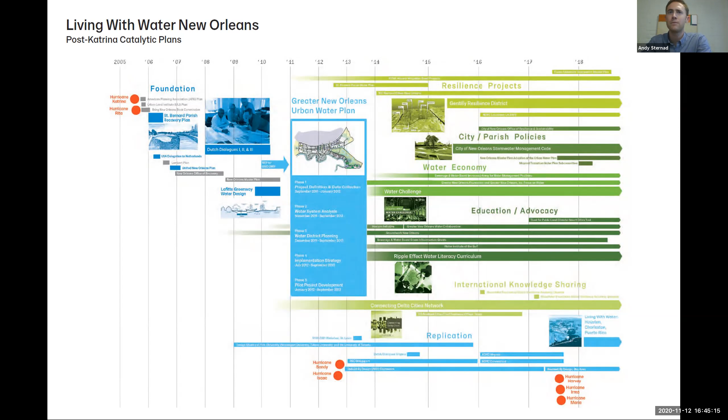So this is a project that we worked on with the city and with DDD. Just for context, I'm thinking about water opportunities, ways to mitigate flooding downtown, at the same time to add streetscape benefits, maybe refresh some of the park and public spaces.

So these are just kind of major stakeholders in the area. I think most people on the call are probably familiar. But the two key things to keep in mind, the two key locations, are Duncan Plaza and the Armstrong Lafitte area. These are the two main public spaces downtown, the two biggest. And they also remarkably are well positioned within the drainage system to make a huge impact in terms of water storage if they can be treated as such. They also tie in to the Lafitte Greenway, Lafitte Blueway proposal that maybe still can be realized in a visionary way in the future.

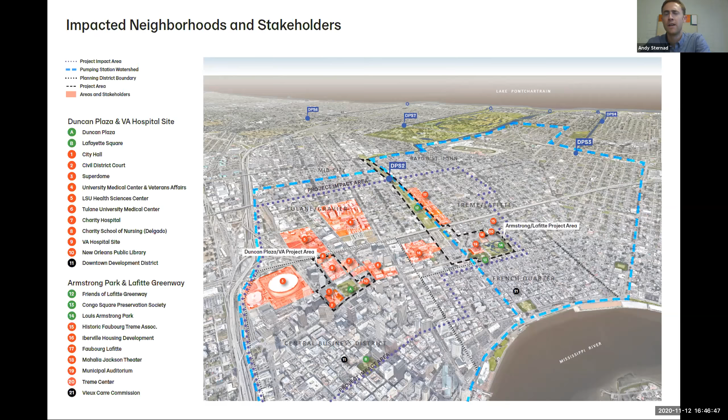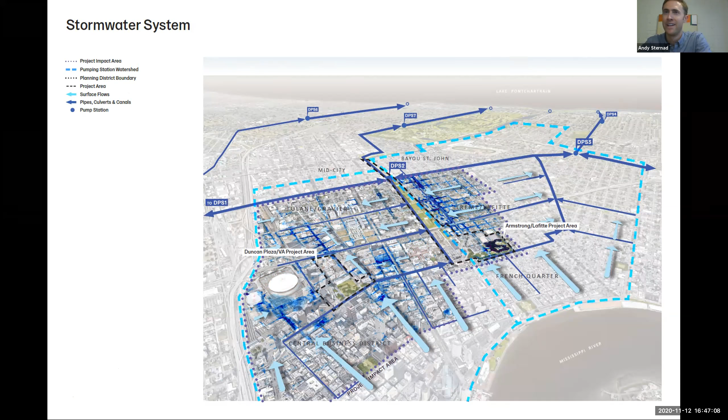So here you see the subsurface and kind of the overland flow system aligned. Basically, water that falls, rainwater that falls by the river is ultimately moving towards the lake. It finds the first drain that it can and goes into those darker blue lines, the subsurface canals, some of them big enough to drive a bus through. This is all things we're familiar with here, and it moves out towards the lake, towards the outfall canals.

But the one to notice here is along Loyola Avenue. That's that orange line. That is a collector culvert for essentially all the water that falls downtown. And it flows underground, kind of along the streetcar tracks, right by Duncan Plaza. It flows to Armstrong Park and then makes a left-hand turn and goes out to pump station number 2, following along the Lafitte Greenway. So that culvert and that pathway is both a source of flooding when it backs up all the way downtown, up the slope towards the river.

But it's also an opportunity because it parallels and touches these public assets, publicly owned spaces that might be retrofitted while maintaining their recreation use, to alleviate the overburdened system. So that's where we focus.

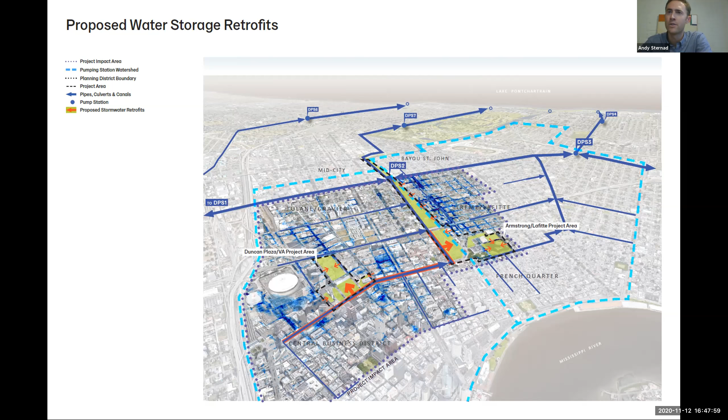And here you see in section, there's a little map key in the bottom left, but these are basically working from the river on the right down towards past the highway. You see how the vertical scale is exaggerated to be able to see the change in topography. But you get these pockets of space, of buildings and streets, behind small ridges and changes in the landscape that end up causing flooding downtown. And then a lot bigger pockets and pooling the lower down the slope you get.

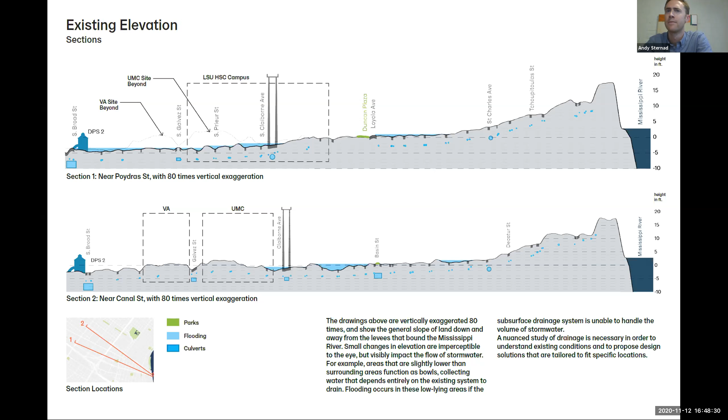But you'll notice that the two areas highlighted, that Duncan Plaza area, where you see those kind of arcing shapes, those are the berms in Duncan Plaza. And then Armstrong Park and Lafitte Greenway itself are higher in elevation than their surroundings. They're kind of that brown color, whereas surrounding them tend to be a little more blue. So it's kind of an inverted relationship right now. Those properties are actually shedding water into the drainage system when they could be collecting. And that's the basis of the proposal.

Just you see a comparison with the historical map. What once was wet will become again.

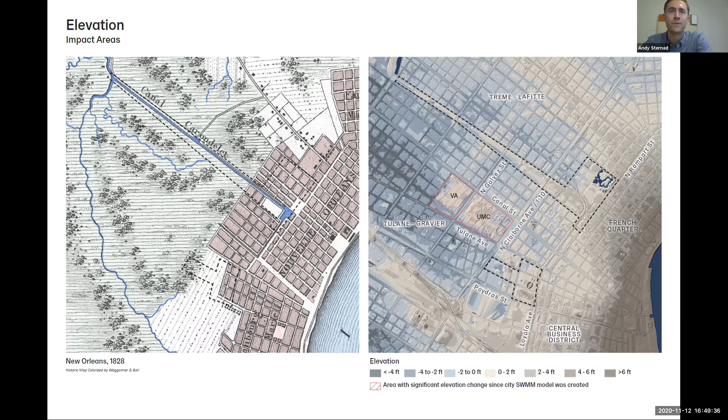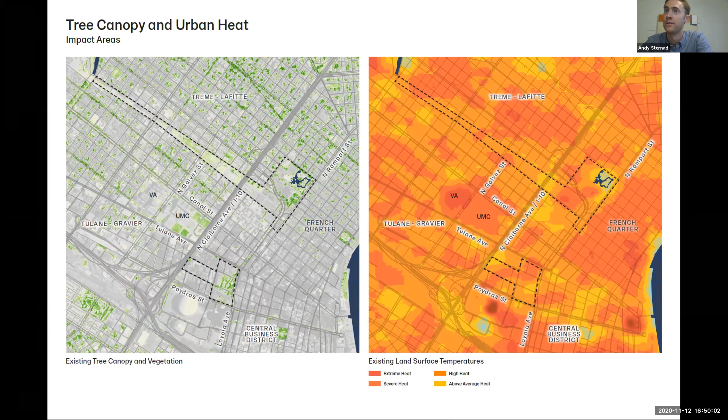And some of the other analysis underlying this project surrounding urban heat. So not only does tree canopy reduce urban heat measurably, but the presence of open water as well. You see that very clearly in Armstrong Park. And there's some historical data going back 100 years documenting the cooling effect of open water in canals, old canals across the city.

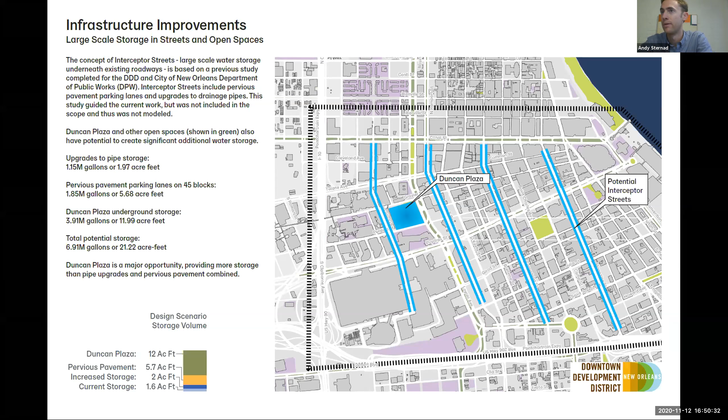So I'll get back to those two main areas, Duncan Plaza and Lafitte Armstrong, in a minute, but part of the proposal was for interceptor streets, working against that section that I showed you, that high ground to low ground topography. So trying to capture and store water where it falls before it can back up those main culverts. We identified through a whole series of criteria these potential interceptor streets higher up in the landscape, closer to the river.

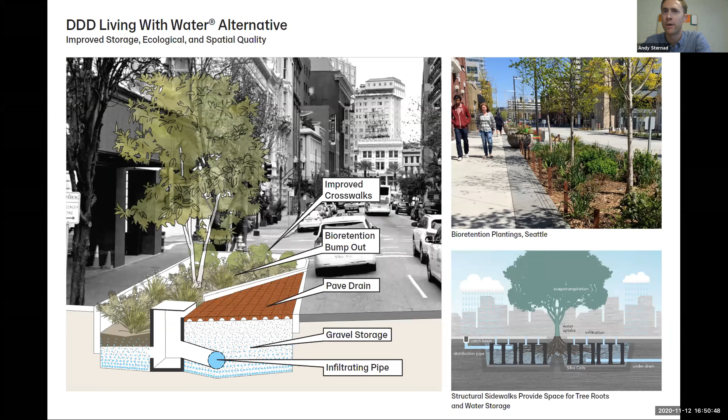It could be retrofitted with really simple things we've all seen before, these rain gardens, but strategically placed on certain streets and in certain rights of way to capture that upslope water. So that's part of it at every scale, starting from rain garden. But the big opportunities we see are these public spaces for their ability to leverage investment around them.

For the quality of life benefits they bring, not to mention the water system improvements, the bigger vision is for a series of scenarios. It's not just one idea or one vision, but a series of development, park design, and water system scenarios on these two locations: Duncan Plaza treated as a whole with its larger context of City Hall, the VA property, and the library. And then Armstrong and the Lafitte Greenway treated as a whole, also considering some of the housing developments alongside and the impounded neighborhoods along the Lafitte Greenway that currently flood. We'll show some potential benefit there.

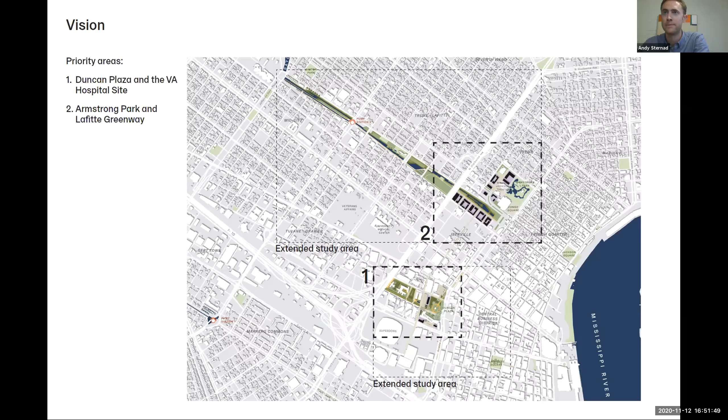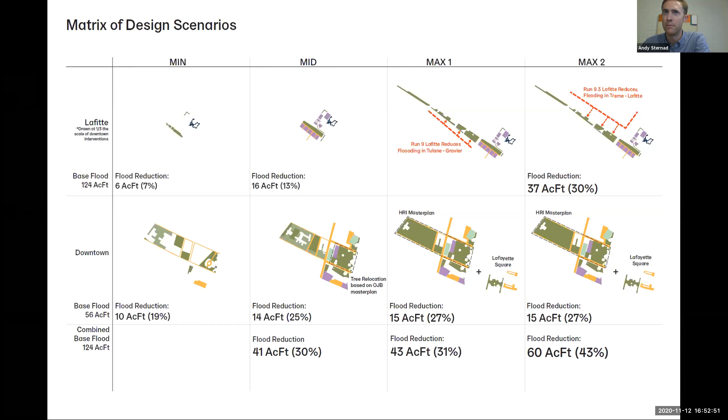The green doesn't represent just open space, the green and yellow together. The point is that this approach, these scenarios, can be tweaked and tailored depending on stakeholders, available budgets, land, and still add up to more than the sum of their parts. So, let me go back one. The proposed scenario was somewhere around between the mid and max. We didn't go minimal and we didn't go max, but tried to show what we could accomplish.

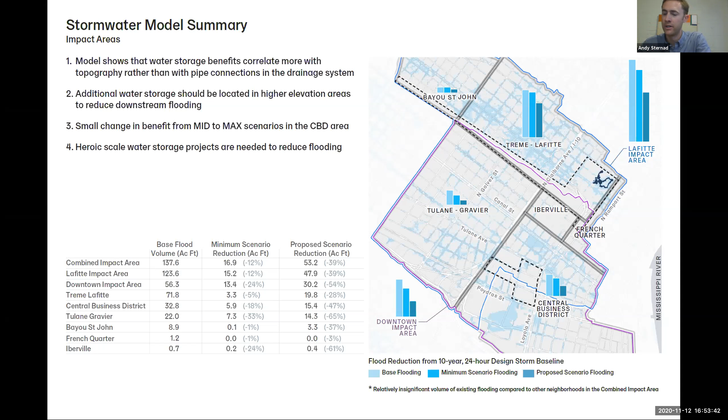For the impact of these particular properties, Duncan and Lafitte, it's huge. We're seeing in some cases 8 inches, 9 inches. In this case, somewhere around 6 to 8 inches of flood reduction. Over the scale of the CBD, that's a huge amount of water and a huge potential system benefit.

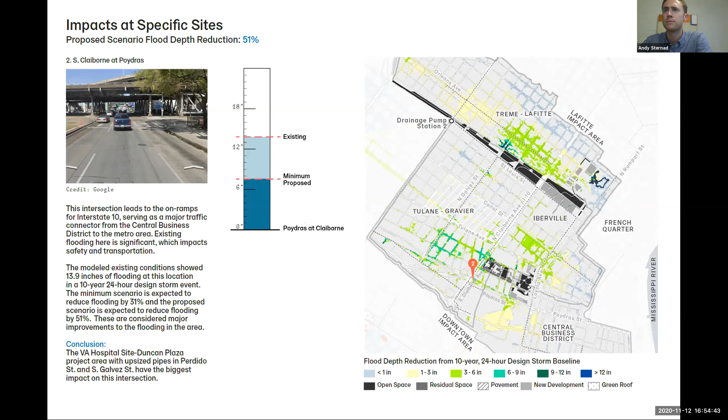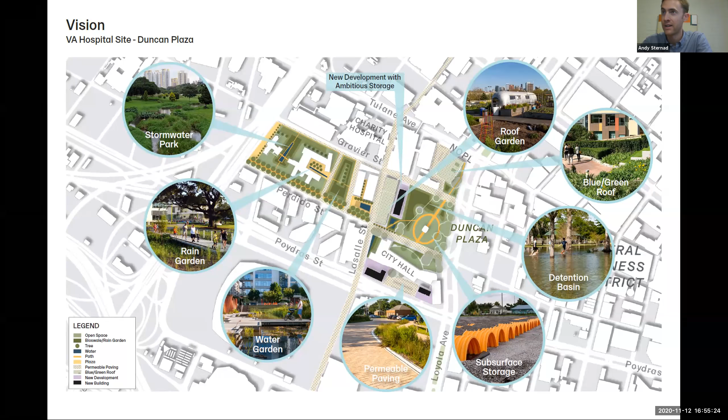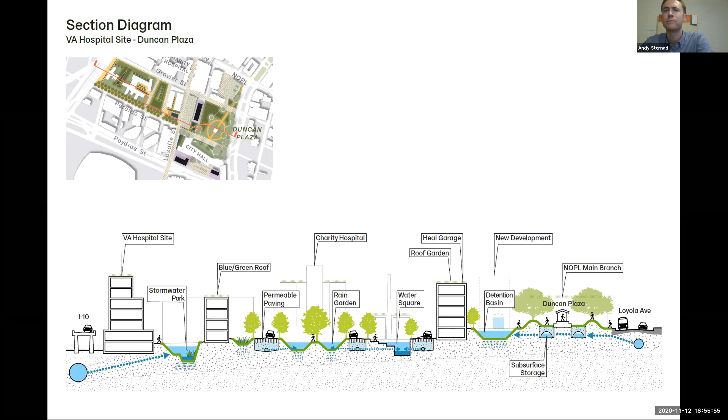Happy to talk more. So the vision for Lafitte is something like the Lafitte Blueway that was proposed in the water plan. Before that, even the Lafitte master plan, there's been a whole lot of proposals.

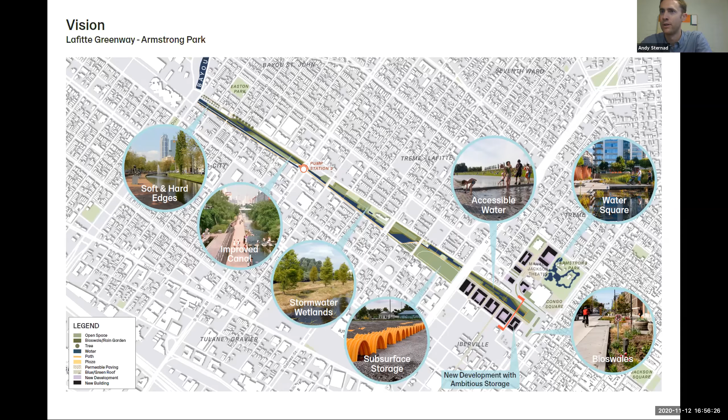The first key here for us is the old location of the turning basin, down on Basin Street, next to the municipal auditorium. That's where that culvert under Loyola turns and heads out to the pump station. It's a critical point in the system to provide a relief valve, what they call inline storage—taking water out of the pipe and storing it within the system, then it drops back down after rain passes.

But this is a key opportunity to tie into one of the oldest, most historic places in the city that was built around water historically. That turning basin that came down the canal from the bayou is the reason why the French Quarter is there. It's right next to Congo Square, aligned with Jackson Square, the key axis in the city. It could be one of the key moments for the identity of the city, tying to our deepest roots, if we can get some water back in there and serve the dual function of alleviating flooding up and downstream. I could evangelize about this thing forever—it's an amazing opportunity.

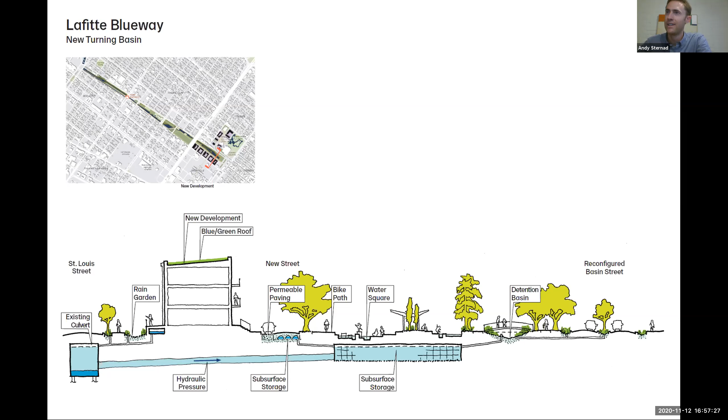Not to mention the conversations about relocating portions of City Hall, eventually a new civic center in New Orleans at the auditorium, and changes to Armstrong Park.

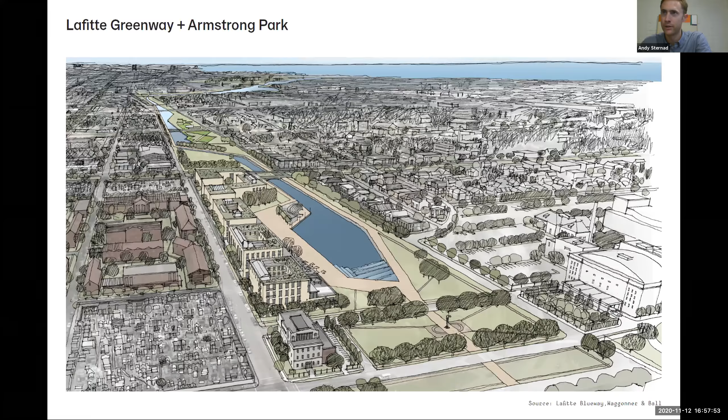Could keep going, but this is just one sketch, revised a little from way back in the water plan—not necessarily a current proposal, just a snapshot of what a coverage condition might look like at this side of the turning basin.

And another farther up. Wouldn't it be great if you could kayak or canoe from the bayou all the way down to the French Quarter like you could have done 150 years ago? It'd be pretty cool, and that feature could fill up when it rains.

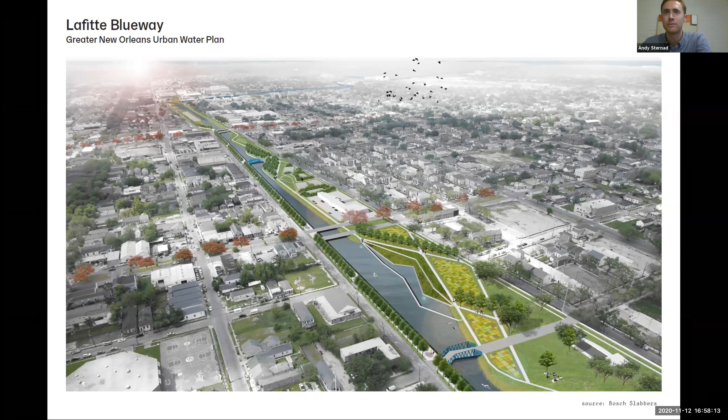Okay, that's the downtown piece. That's work that's happened over the last 6, 8, 9 months maybe, and hopefully can coalesce an energy around those projects with some other redevelopment ideas downtown and move forward.

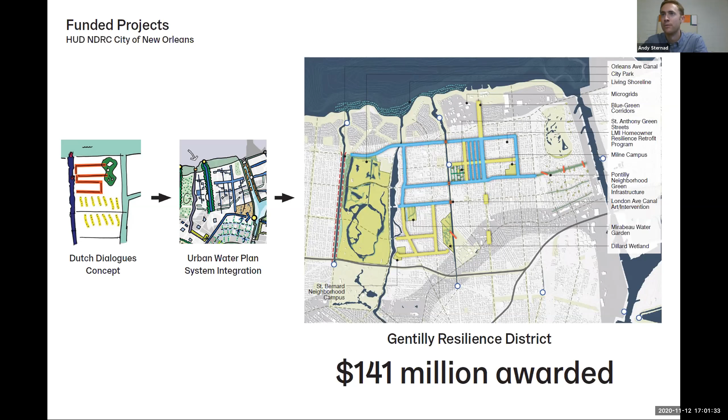A lot of firms in town, different firms are working on these projects. I think it's a great example of collaboration with the city and the kind of ecosystem and community of expertise that we can build up here, to David's point about what we learn here and what we take elsewhere, treating this work as a real living laboratory.

So part of the district, of course, is about mitigating flooding, and there's some measurable reductions and some modeling behind these projects.

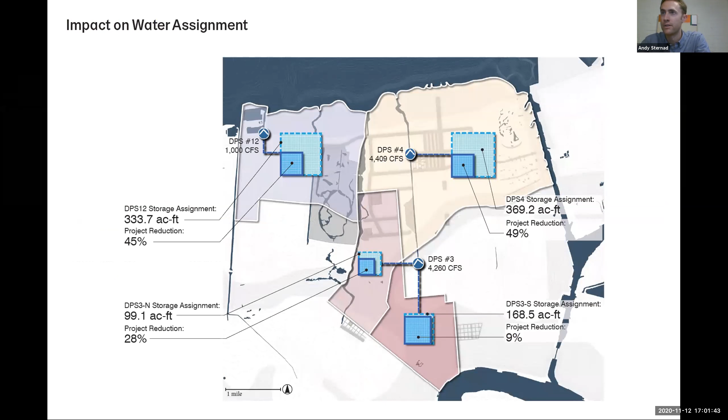City Park is a key part of this project. Also an ongoing project that we're working on with Batcher Engineering to find a way to add a little more stormwater storage, especially into the northern parts of City Park.

But it's a real comprehensive look at the lagoon system, which currently drains out of the park. There's inlets from the bayou, fill up the lagoons and keep the water levels stable, and any additional water is moving out into the drainage system.

It's another opportunity to reverse and let water back in when it's raining. Similar condition to opening up those buried culverts around Duncan Plaza. There's another one under Robert E. Lee along the north side, which could feed stormwater storage in the park while alleviating flooding in the surrounding neighborhood. So another one that's still underway.

But one of the keystone projects in the district is the Mirabeau Water Garden, and this is one that we've been working on for a long time, and hopefully will be breaking ground soon, any day now, hopefully in the next couple of months, maybe 6 months. But it's been ready to go for a while.

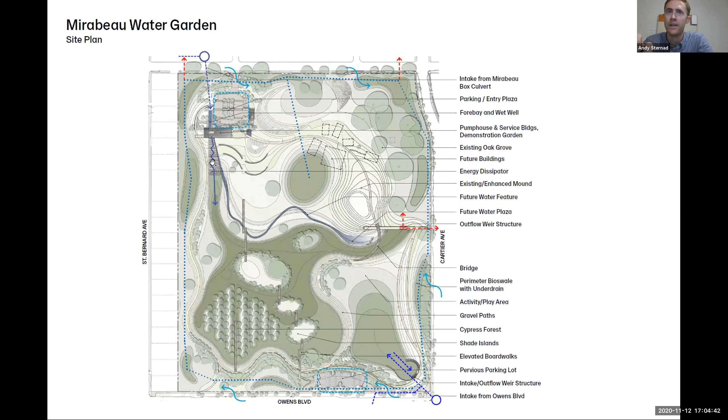So what we've proposed is another way to take water out of the overburdened system, in addition to taking water overland from the neighborhood and providing space in the park to store it. So there's a pump station in this upper left corner that's drawing water from underground when that pipe is full, and then allowing it to cascade across the landscape.

If you squint at it, it looks like some of the patterns you might see in a marsh restoration. I hope there are some familiar patterns to our local eyes. This landscape can fill up and then ultimately slowly drain after the storm passes.

So earlier kind of concept rendering, it's a little wet when it rains a little bit, and it gets a lot wet when it rains a lot. And it's an active and passive system combined.

The importance of this site in the larger water system is twofold. It's a really particular site that just coincidentally almost is available and happens to be really well located at the top of the watershed. So sort of the way downtown, where the projects you do in Duncan Plaza and Armstrong benefit everybody else downstream in remarkable ways.

But the second aspect is what's below ground. You may be familiar from Richard Campanella or others about the Pine Island sand trend that runs underneath Gentilly, all the way out to Mississippi Pass Christian. It's a remnant dune structure from when the coast of Louisiana ran through Gentilly, before the Delta was here, before the river created the rest of the Delta.

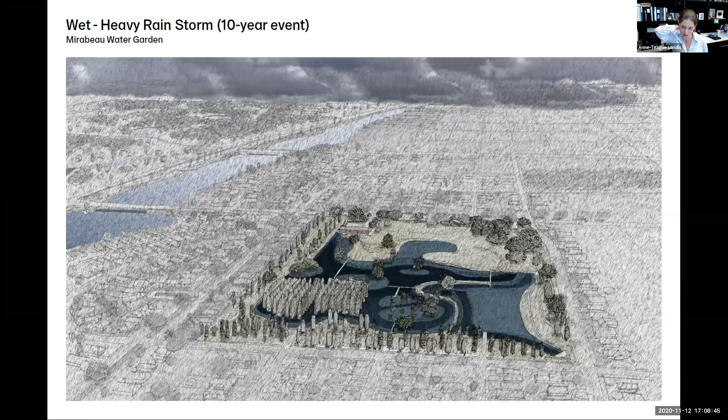I am. So there are a couple questions—I seem to be full of questions myself. From what you just covered, for City Park, I think you were focusing—you said there's a large park that's like on the north end, which happens to be where a rather expensive golf course is. Is there any push, does it create any kind of threat to that, that's creating pushback, or does it contemplate protecting that revenue generator for the park?

Yeah, so if it did flood, Anne-Teague, there would be water that would then back up through the enhanced lagoon system and flood some of the golf course. But that would be in a catastrophe, and it would keep the neighborhoods from flooding. Basically, on the west side is where the water would enter—it might enter as far over as the USDA site. We're still negotiating that passage across Robert E. Lee.

A project like this, interestingly, I think has great benefit to Lakeview, because if you're taking the water out here, the drainage system is moving onto Lakeview, so your water levels in Lakeview drop by virtue of this. So it's an interesting juxtaposition of where water falls and where it runs and where it floods. But this has been worked through with the park, and you can bet that Bob's probably not going to let us flood that golf course.

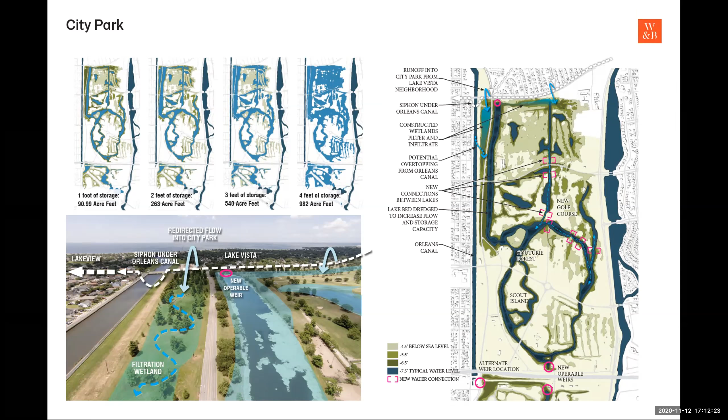David? I was going to say the Genesis program was Ripple Effect, set up to educate kindergarten through elementary school kids, but that program has expanded through middle and high school now. Ronell, I'd think Ripple Effect would be a good place to start, because there's several years of research there. There are programs like Dillard's workforce training, a component of that in the Gentilly Resilience District funding, and Tulane has some further programs. It really depends on the student and their ambition. There's also Groundworks, a great success story training people to build and maintain this. So there's a wide array of jobs, and someone who's 34 versus someone who's 13 would be looking at different aspects of that. But I think Ripple Effect is a good place to start.

Okay, so is it possible to get your contact or someone else's so I can continue that conversation after this presentation? Absolutely, I'll flash my email up at the end. Great, appreciate it. Andy@WBAE.com.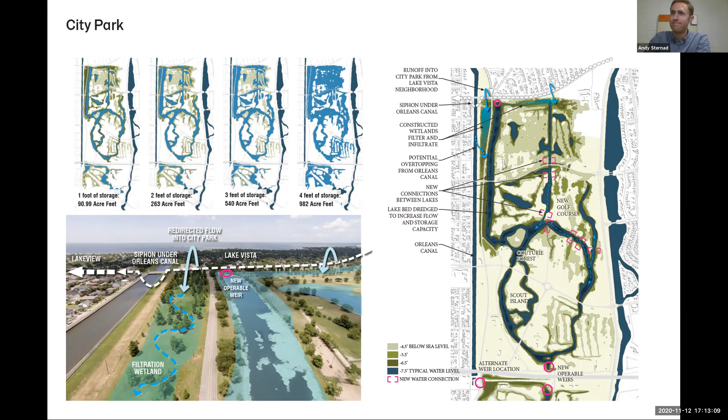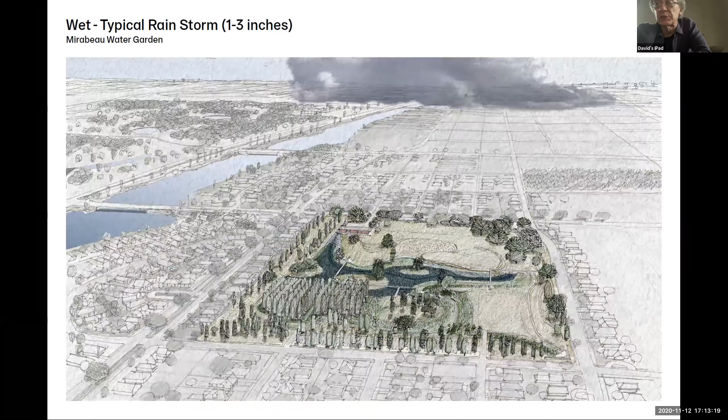Renell, that's actually the best question we can get - how do kids learn how to do this, right? The Ripple Effect program teaches kids about water and design, and of course they learn math, science, and about the world because it's tangible. So it's a great question.

All right, two more questions for y'all before you move on, Andy. For Mirabeau, for example, but for any project where water is expected to collect so it doesn't go through the drainage and into the streets, does that create any concerns about mosquitoes?

That's always the top concern, always brought up, and it's a good question. We typically design to be fully dry within 48 hours, and that's kind of the magic time frame. If we can eliminate standing water within that time frame, it reduces the mosquito load. However, it's another question to continue investigating - we can't introduce disease vectors while trying to solve another problem. Another way to answer that might be through natural solutions: within 48 hours in a project like this, there's going to be a lot of critters and frogs out there that help us out. So the 48 hours is the key metric we design towards. 72 hours might be more precise if you were at the long end, but 48 is quite good for the mosquito board here, unfortunately.

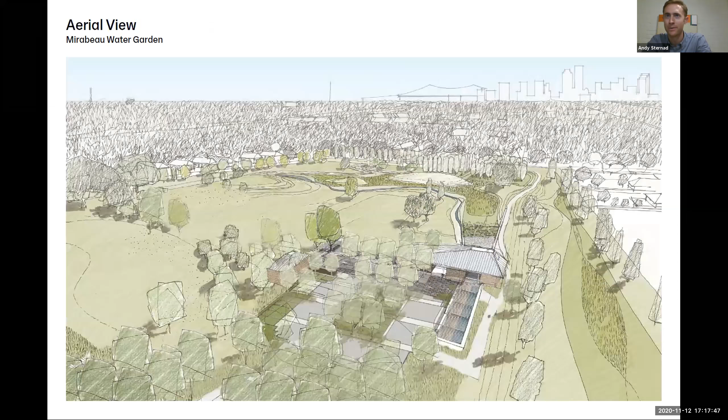Well, thank you. Andy, if you want to carry on, and we'll try to catch these other ones at the end—that would be awesome. Let me go for 5 or 6 more minutes, and we'll probably get 20 more questions when you hear about Isle de Jean Charles. But this is great—participation is awesome. Sometimes these are deadly. Sorry, a little raw about Zoom meetings these days.

So it's a plan that's looking long-term at adaptation. LA Safe stands for Louisiana Strategic Adaptations for Future Environments. It's really looking fundamentally at the ground—the high and low ground—who's on it now, how best to use this finite resource for long-term stability, and a whole host of other environmental factors and natural solutions. It's fundamentally a landscape plan based on elevation.

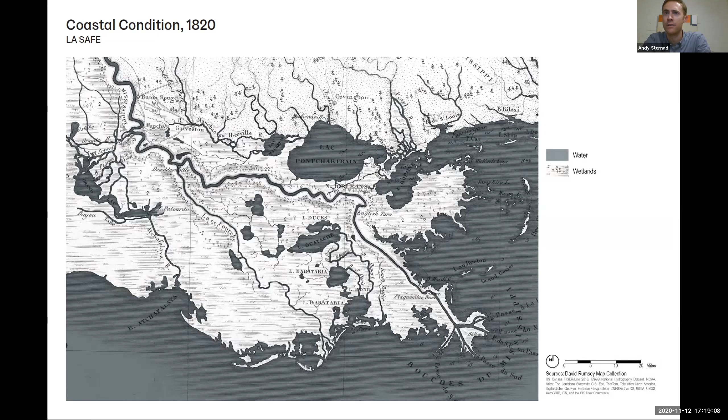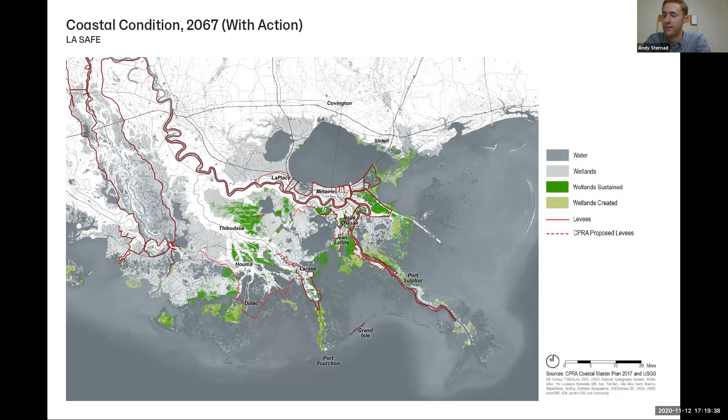There you saw the delta that once was. Here's the delta that might be in the future—in parentheses, with action. That's with the coastal master plan implemented, and the impact it's expected to have. It won't be fully restored to its past extent, but nevertheless there's potential significant impact that would further protect these slivers of high ground, this finite resource that we've got. So that's kind of a base condition for this study.

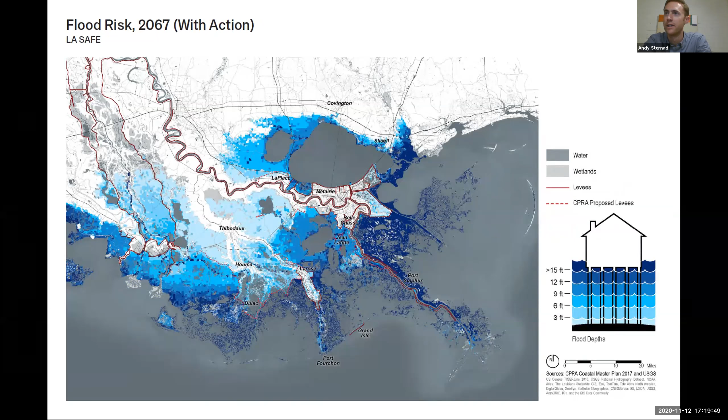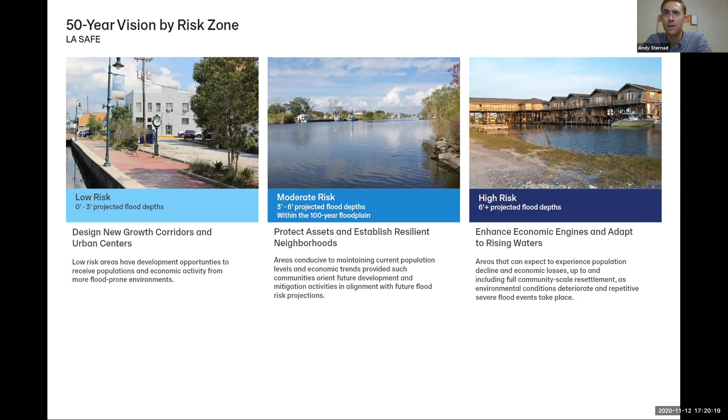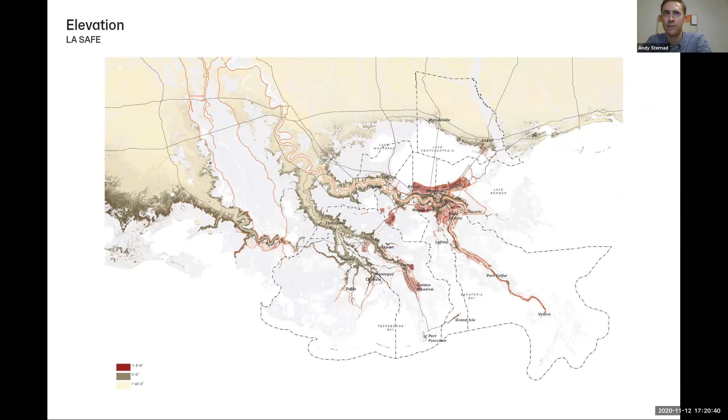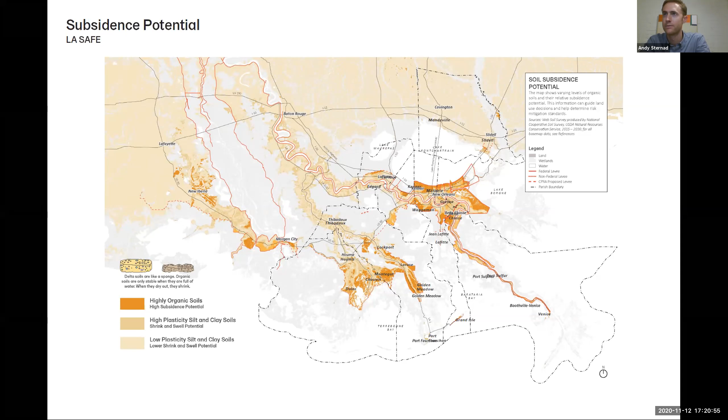We also analyzed elevation, and this was all part of a suite of reports and documents available online—I'll get there in a second. It's a very high-level summary. We looked at subsidence, the natural consequence of building levees and pumping within them, or at least pumping the way that we have. So every levee that's built on the Louisiana Delta causes subsidence—I don't know of a case anyway where it hasn't. And then an overlay for ecology and infrastructure.

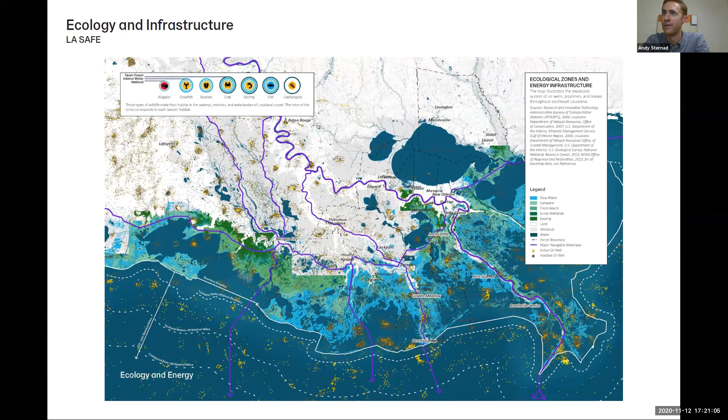Many, many more maps—there's a whole host of these that's available. But again, similar systems thinking to downtown, to all these other things we've been talking about, Gentilly—understanding the impact of parts and whole across systems, and what their mutual benefits can be, more than the sum of the parts. So we created, with a lot of other partners, an overall regional approach, and then there's an approach per parish, each of those 6 parishes. A lot of this thinking has influenced the Louisiana Watershed Initiative underway—watershed-scale planning across the whole state. There you see lasafe.la.gov, lots more information there.

Main goals, writ large: flooding and subsidence, how to stabilize long-term growth, mobility and transportation, the economy, and cultural assets.

So those were also mapped. There's a whole series of chapters about that. But one that I'll return to in a minute here is shifting populations, and how we're already seeing this ad hoc migration away from the coast.

And the first real coordinated example of that is the Isle de Jean Charles relocation, which I'll end on in a minute, in Terrebonne Parish. The point being, I guess, that this is already happening in a way that we should acknowledge and begin to plan for.

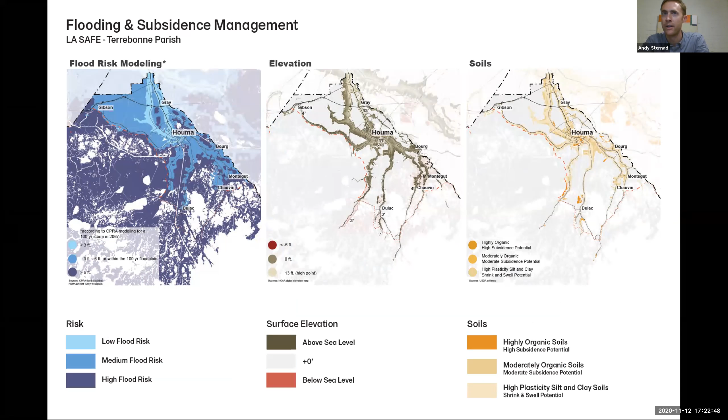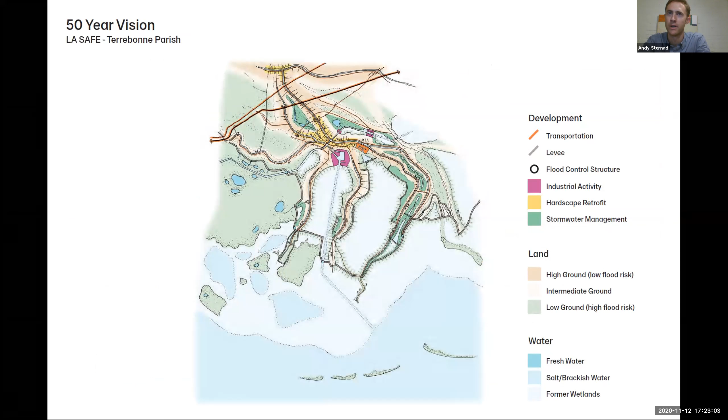So here's Terrebonne Parish itself, excerpts from that parish scale document, similar types of analysis, similar layers. This will set the groundwork for Ile-de-Jean-Charles, which plugs into the same principles, demonstrates these principles. 50-year vision includes ecological restoration, accounts for relocation, economies, cultures.

LA Safe included 6 pilot project designs for each of the 6 parishes, so 36 pilot projects proposed. Those range in scale from something like this, a harbor of refuge and a seafood market, so a place where fishermen could pull their boats when the storms come in and close a gate, or behind the gate, to...

Gretna City Park in Jefferson Parish. That's a project that we're proceeding with right now. Should actually start construction in the spring. Something like it's a project like Mirabeau on the West Bank.

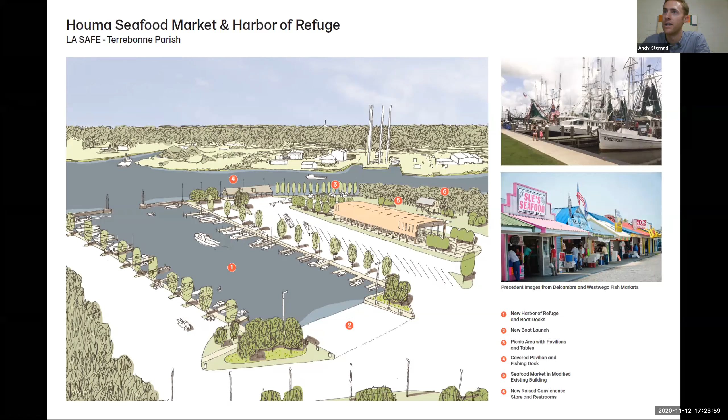But one of those 6 projects per parish was funded through this grant program, and that's how Gretna City Park came to be. That was the chosen project for Jefferson Parish. But each parish has its own project in some stage of working towards completion.

This is the home of the Biloxi-Chitimacha-Choctaw tribe, a branch of the UHN, United Houma Nation, or UHN. They have lived here. Their ancestors were pushed here to the fringe of the marsh during the Indian Wars and the Trail of Tears era, and have basically existed, sometimes subsistence existed here on their own, until climate change came to them, and marsh loss and energy industry impacts, on and on.

So the tribe initiated plans to relocate themselves as a community. This was over the past 10, 15 years maybe, and was successful in winning a federal grant. And that's where we ended up ultimately coming into the picture to help design the new community where they plan to move to.

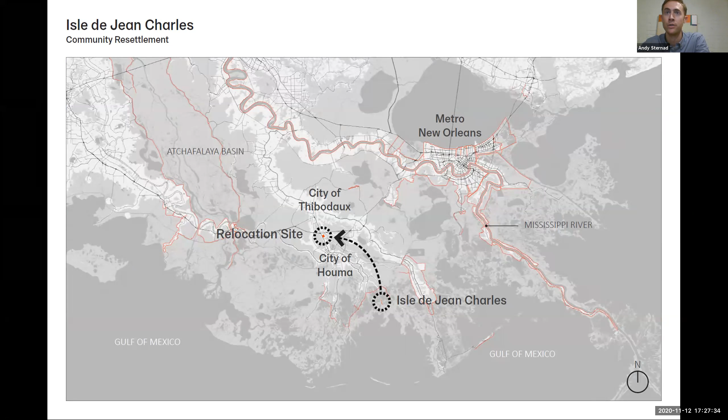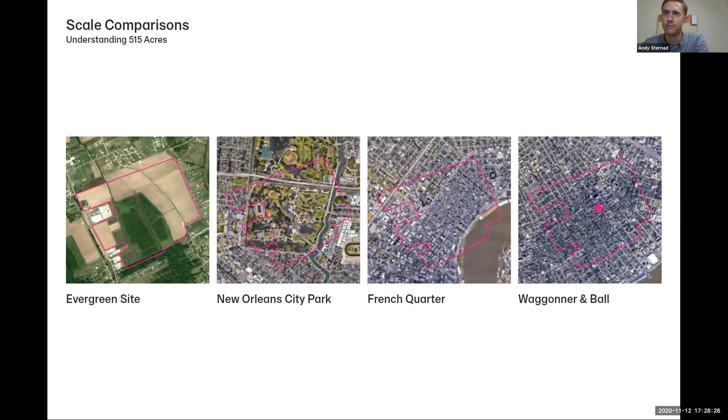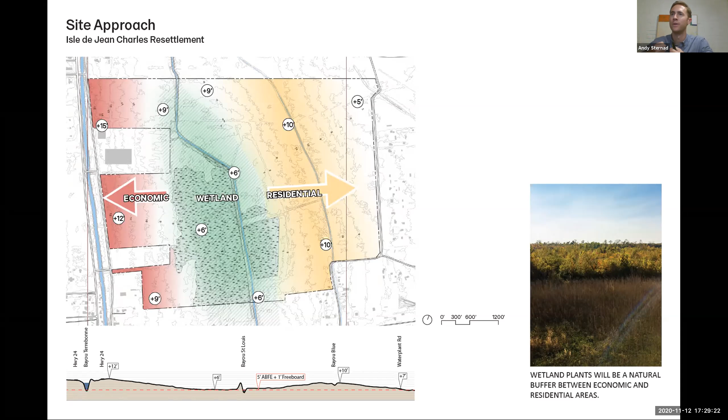You're familiar with the landscape in Louisiana with the high ground along the old bayous, so those are two old bayous with the most stable ground. There's a little bit of a tension—in traditional planning, you locate density around transportation, closer to the roads, transit-oriented development. We're familiar with that. In this case, the community preferred to be more secluded and try to recreate their island life. So there's a tension between connection and solitude.

I'm wrapping up here. I know we're about at time, but there's the site from the air and this master plan we've proposed. We worked on this with Olin Landscape Architects out of Philadelphia.

On the left side, Highway 24, the commercial economic heart. There's some commercial development, an orchard, some community market spaces proposed along that edge, whose revenue is meant to fund or help subsidize the project and the ongoing expense of the site. There's a new water management feature, a new island with a community center, and this woven pattern of streets through the residential proposal.

It's designed for about 150 households—that's that historic number on the island. Phase 1 will be about 40 households. But the pattern of streets in these scalloped edges is meant to collect the view sheds from each house into a natural feature, whether it's reconstituted bayou or wetland behind them, trying to keep neighbors out of each other's backyards, because that's the overwhelming feature of the current island.

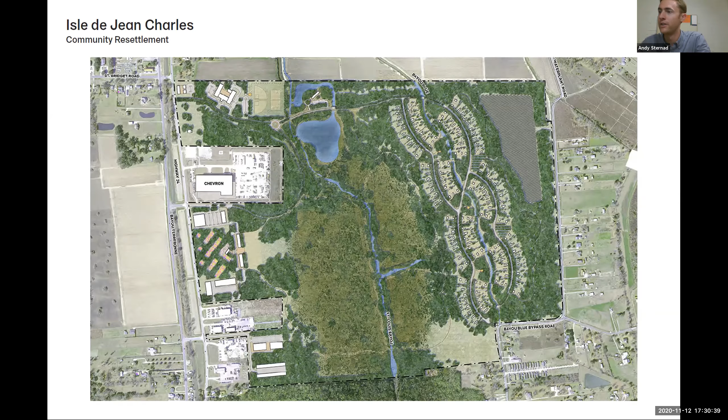It's a natural condition as far as you can see behind you. And a little bit of the hydrology, both working with the natural and also new hydrology to reconstitute this historic Bayou Blue—store water on site, filter.

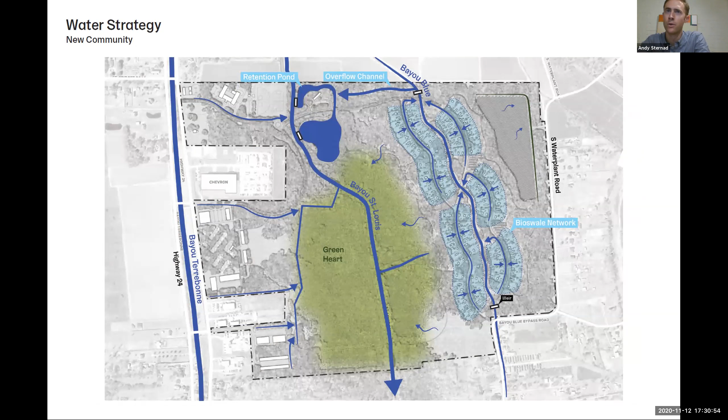Here's that scallop proposal, these pockets in the residential development where homes are kind of—the view from the backyard is collected towards natural features.

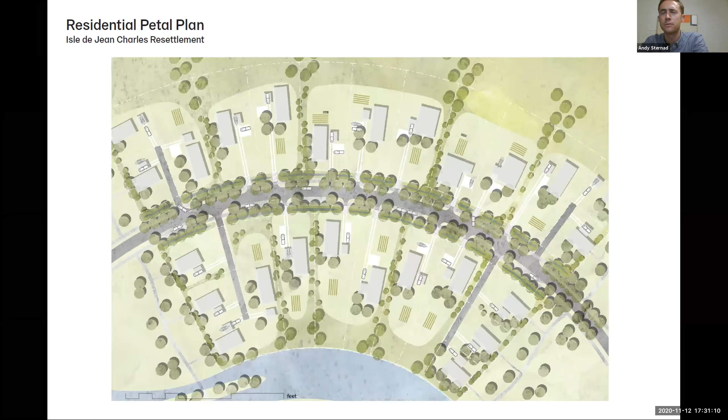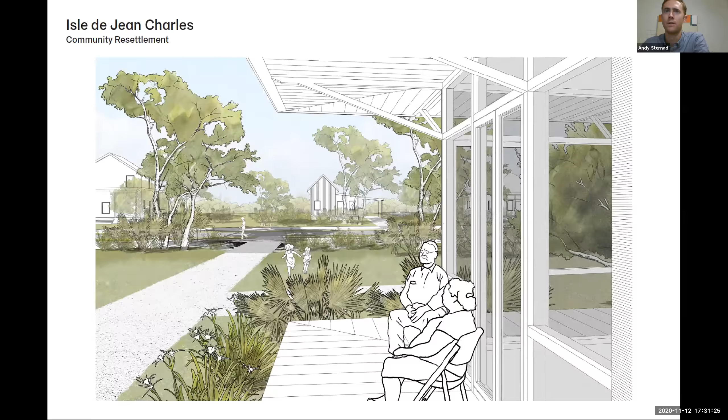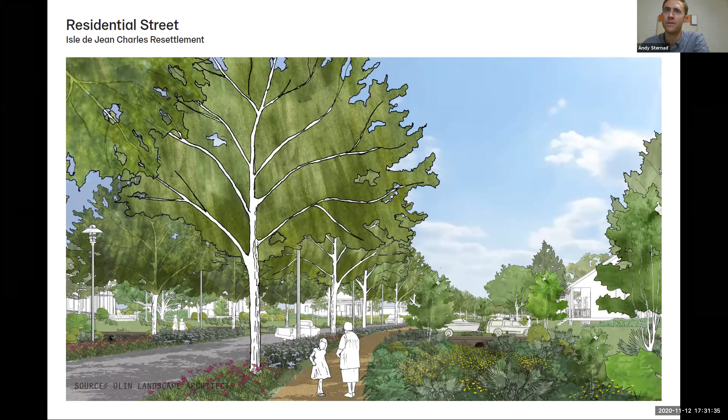We developed a whole series of prototype designs for the homes, and the residents can choose, trying to tie back to the landscape, those forms that you saw from the island itself. A lot of work thinking about setbacks and character in addition to water management on these new residential streets, trying to give some semblance of where the community came from, where they currently live.

Lots of workshops on the island. I promise I just have 3 slides left.

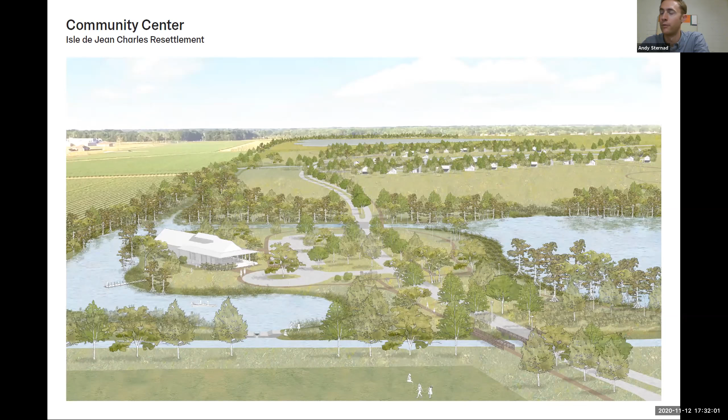Here's that new island with the ponds and the community center. This is kind of a gateway to the community—crossing bridges, passing across this island through the new lakes to get to what hopefully they'll think of as their new home. And then a trail network running across the site, with the community center in the background.

So that's it. And maybe a message at the end: returning to David's point about lessons from Louisiana, sometimes the lessons are right around us, I think, and sometimes we take them for granted—what natural conditions we have and what they mean and how they work together already as a system. We're able to adapt the way we live and fit better within it. I think we can be a leading example for a lot of other places that are soon to face the challenges we're facing now.

For instance, I know we have several neighborhoods out in this area that have neighborhood lakes. I'm not sure if those lakes are tied into the system or not. As you stated, I know there are certain areas of high ground. I wouldn't be surprised to find out that along Chef Highway, which is high ground in Eastern New Orleans, that would also have that sandbar barrier that goes all the way out to Pass Christian. And knowing that some of the land loss is projected to be in the furthest parts of Eastern New Orleans, around the wildlife refuge, I'd love to talk with people about how we can get this started in the Eastern New Orleans area, if I can be pointed in the right direction.

Well, I welcome the conversation with you directly, Romell. We need advocates. We looked at three or four projects that could happen out there. You can look all the way from Six Flags back to the redevelopment next to the hospital that could occur as project areas. There are many things you can do. Please, we welcome you to contact us and continue the discussion.

And the lakes aren't really connected to the water system very much. They're actually operating parallel and mostly independently. Thank you for that, I'll make sure I get your information before we end the call as well.

The last question that was submitted a little bit ago was about the implementation of green roofs, particularly in commercial spaces in the CBD. Would they have many benefits for surrounding neighborhoods? What would you recommend for implementation? Are there tax incentives, mandates, subsidies, et cetera?

Andy, you want to talk about it? It's obvious, if the structure can take it, it'll have great benefit. The runoff will be slow, the environment will get cooler. I had a call with Rotterdam this week, and they think green roofs should be everywhere. The benefits are great. Do you have the structure? Do you have a qualified roofer to put that roof on? It's harder to inspect. But this is an industry we should be investing in. We should be having green roofs in New Orleans, Louisiana, especially downtown, because the streets are going to run the water off and the buildings can slow it down. There are also ecological benefits: the air gets better, it's cooler, bugs are happier—not termites, hopefully.

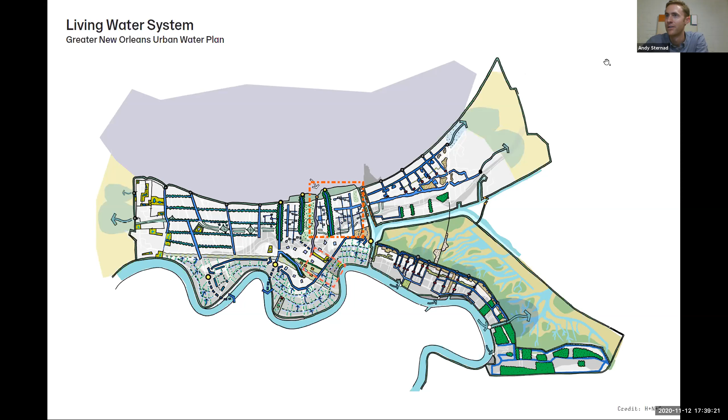The first inch of water must be held. If you take that regulation as written, it's an opportunity to create a garden on a project around a building. You could store it underground, store it in a green roof, or use regulations already in place to improve a project and the experience of the people who will be there. So I see those things more as opportunities for a designer to take the regulation and make a space that's better for people.

But to be optimistic, Antique, if we had an administration that prioritized that—not locally, but as a federal program—I think people would figure out how to do it. I think we need it all over the place. The poorer cities like ours have a harder time doing it.

The only incentive we really have right now is the defeated one about having a sort of tax or runoff fee on your property. If I had a runoff fee, I would want to hold more of that water. But we don't have that, so that's a negative thing. The carrot part has got to come from the federal government, because the state's probably not able to do it right now either.

There's a combination of solar and green infrastructure that researchers in Rotterdam are finding to be really good. So I think it's about how much we want to advance the agenda and how slow we are to make these adaptations, given that our city is fairly low and the water's rising.

One of the reasons our work progresses is people take us seriously because we're from New Orleans—'oh, you poor people are going to flood, right?' So maybe food, maybe football, and maybe water is what we get taken seriously for.